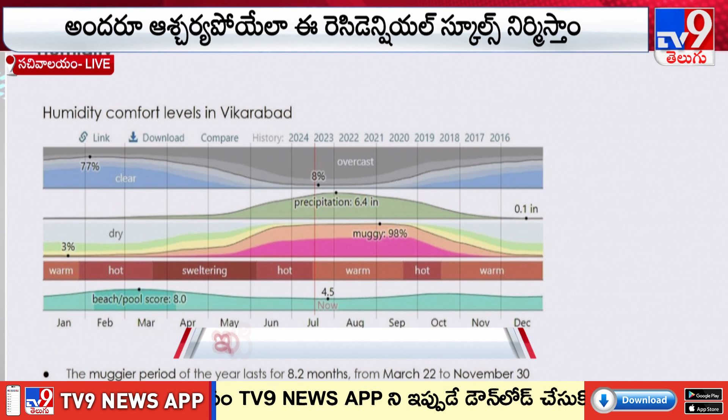So it's a nice part to look at, and the wind becomes an important part of looking at how you orient your buildings and make them naturally ventilated. Because of all these factors, the comfort factor comes in from the humidity that is there, and how humidity gives you discomfort is an important part of our building planning.

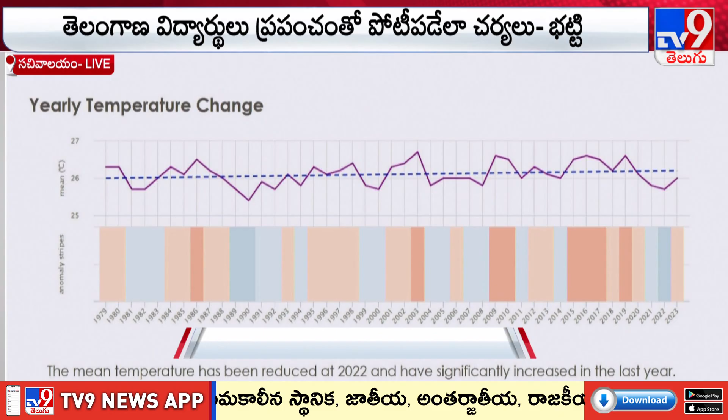And we've mapped for almost 45 years how the change in temperature data happens every year. We can see a significant drop in 2022 in Kodangal, but in some other sites it's going up. This is called a sun path study diagram, where we map the sun for the entire year and how it behaves on the building.

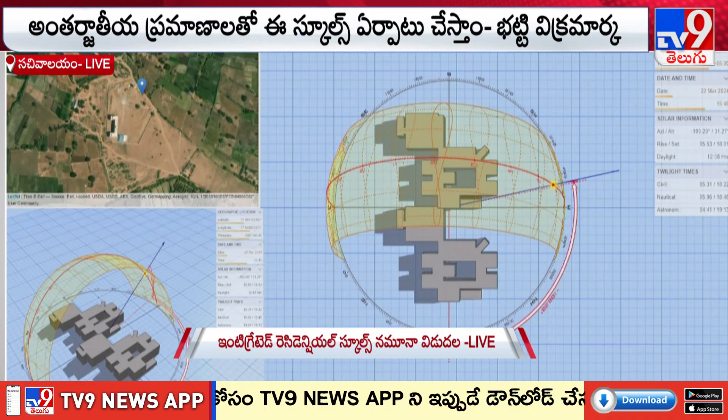So that's the location of the site in terms of the elevation. There are two lakes across the sites.

And we're looking at how the site sections work through this. That's the overall site plan, which talks about the contours of the site, with the lowest being on the northeast and the highest being in the center of the site. There's an existing building that's there.

So this is an existing building and some photographs of the site. The current school is working in this middle photograph that you see. The same classroom is used for sleeping as well as for studying.

So our basic master plan zoning is based on how we look at creating an environment that is interactive for students, and they live as one. It is said that the quality of institutions talks about the future of the country, and how we plan them and create memories for those students becomes important, not only in the learning environment but also in the living environment.

Here we looked at the central axis that is created over there. And that's the open field that we're looking at as a cricket ground. Over there we have the educational academic part. Down we have another sports field. On this side we have the hostel facilities, and the existing building is repurposed.

So this is the master plan, where the master plan for the integrated residential campus addresses varied needs relating to teaching, residing, playing, working, etc., by taking into consideration the climatic condition of the site. The campus tries to bring together different communities under a common umbrella of an integrated school, providing this community access to quality education and state-of-the-art facilities.

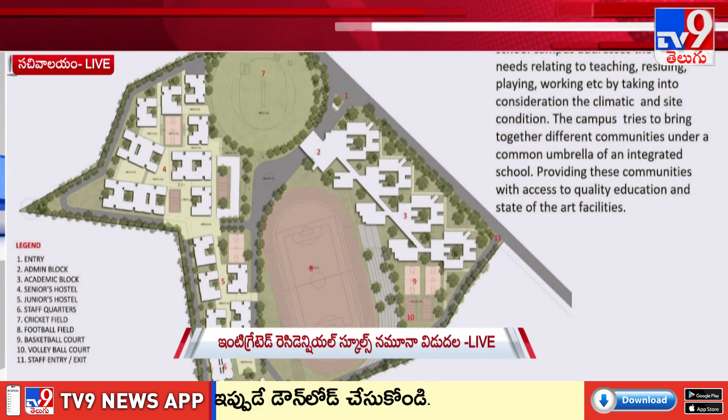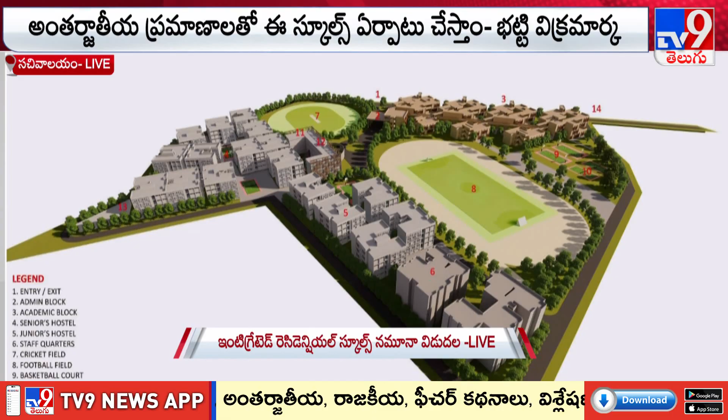So this is the planning which talks about how the behaviors will be of different people and how we can come about. That's the isometric view of the complex, how it would intend to be.

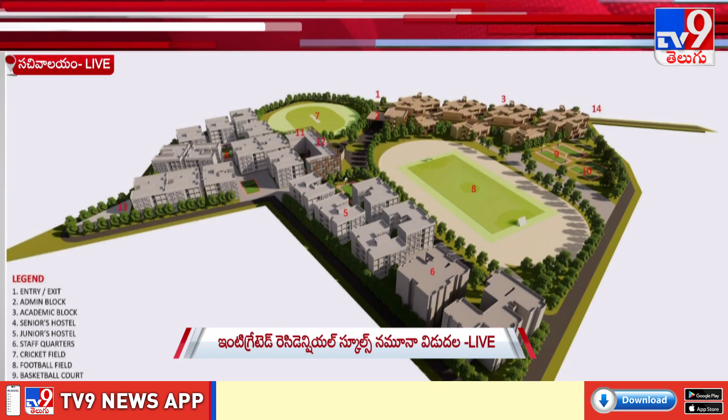So we have northeast a cricket ground, and in the south a football field with athletics track, and then we have multiple courts over there which are to do with volleyball, basketball, and Indian sports as well.

So that's a cluster plan which we're talking about how the four integrated schools will come together. That's the ground floor plan, where we're looking at how each school gets its identity, while at the same time getting integrated with the relationship between different buildings.

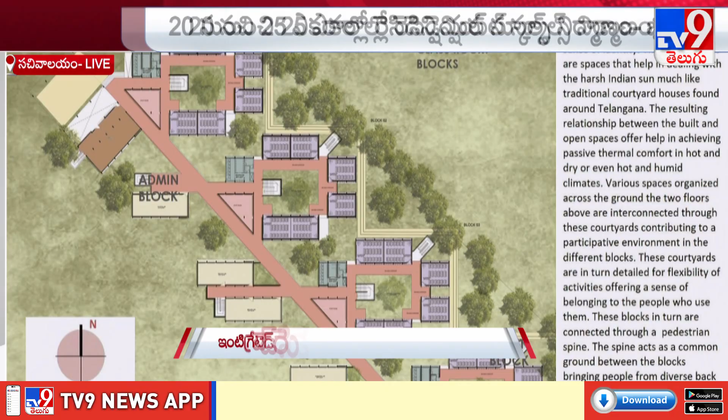The whole orientation of the blocks and cluster is done in a courtyard plan, which allows for traditional methods of building, where the wind flows through and keeps spaces naturally ventilated. The proposal is that we're not even putting windows together in the classroom blocks, and there are shading devices which will naturally ventilate the building and keep it cool all the time.

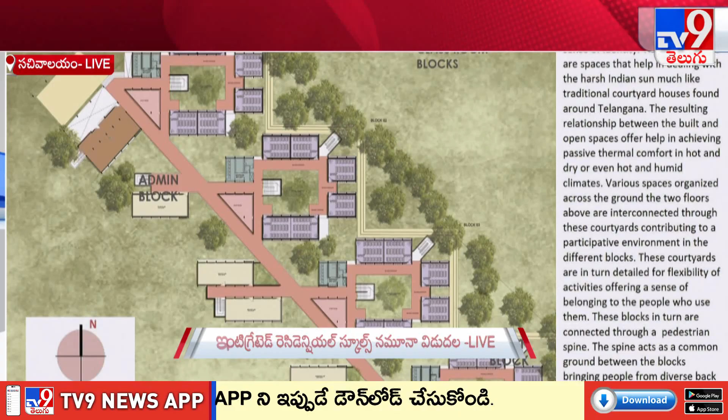That's the first floor plan. That's the cluster block 1, block 2 plans. And this is details of the play fields, where we have the football field and the athletic tracks, the small amphitheater there, and that's the cricket field.

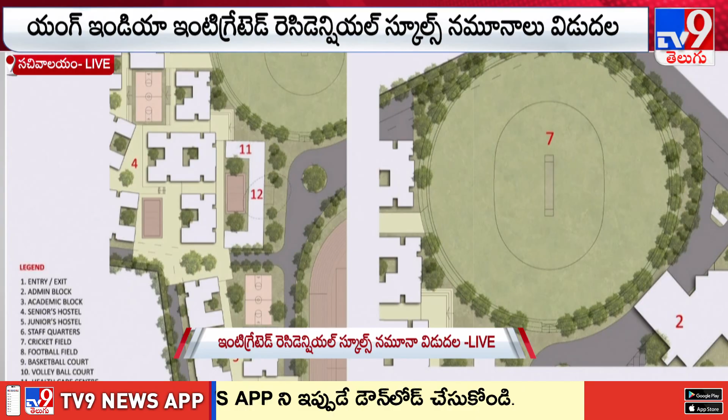The hostels are thoughtfully designed with a low-rise structure. Each of them creates its own identity, similar to the street network we have in our cities. It creates memories of different places and how you find yourself combining with other people. Each dormitory accommodates about 12 people with its toilet facilities attached close by.

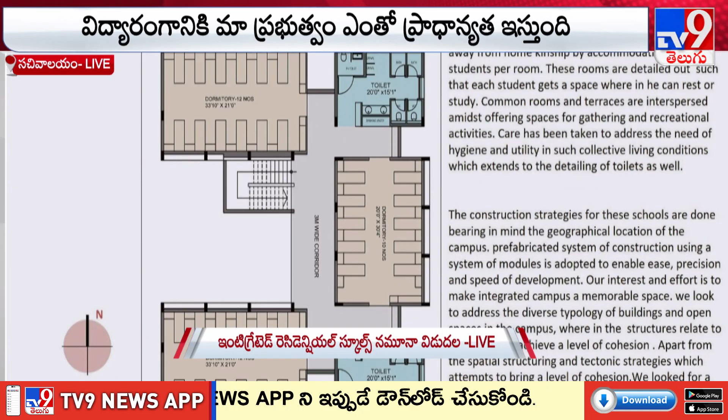That's staff quarters. All the staff will be on the campus, which means there will be a lot more dedicated time given to student and faculty interactions.

So that's the view of the complex, the entry view. This is the main entry to the admin block and the school.

That's the view of the corridor where all the schools get connected. So the whole idea is the built and unbuilt come together, the landscape, the sun path, the environment around, all come together to make a unique experience.

And the courtyards play an important role, where all the students can come together during break times and other times, interacting with each other. So these are the memories that one can carry through their life.

There are also amphitheaters in various areas which we have created using the natural contours, and they again become recreational spaces for students spending their time there.

That's a view of the hostel block. That's a view of the terracing that's done because of the contour.

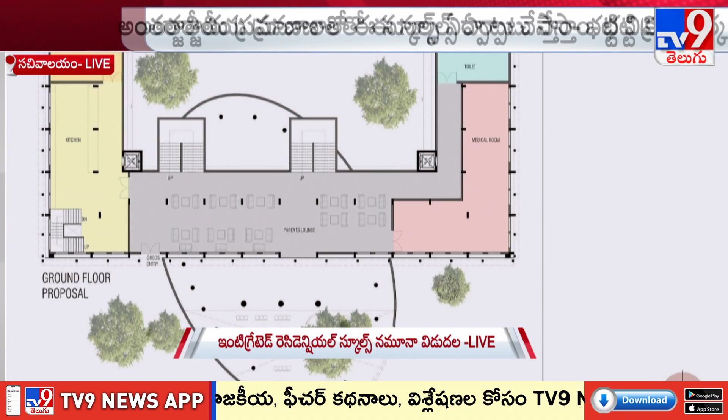This is the existing building which we are repurposing. So we're reusing the building by removing some basic walls and adding a few infrastructure elements like staircase and lifts, and adding a dining, kitchen and clinic facility, and also indoor sports.

So the building has now been redesigned with a facade which is responsive to climate. It was facing east-west, which gains a lot of heat. So we have changed the orientation and made the facade look better.

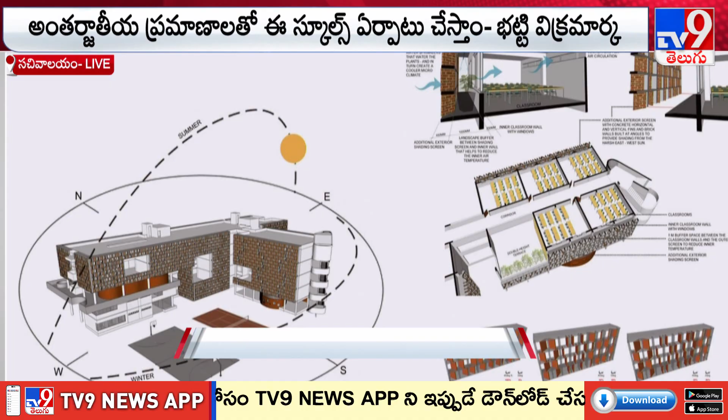Sustainability of any building is important, and our net zero goals are how do you achieve them. This is the basic behavior of the buildings when it comes to sun path and how we shade it.

So this is the idea of how you create natural light and ventilation, where we create a light shelf which bounces off the ceiling and gives you good quality ambient light, and the outside is shaded by the jali. The terrace is used for solar panels and recreation spaces.

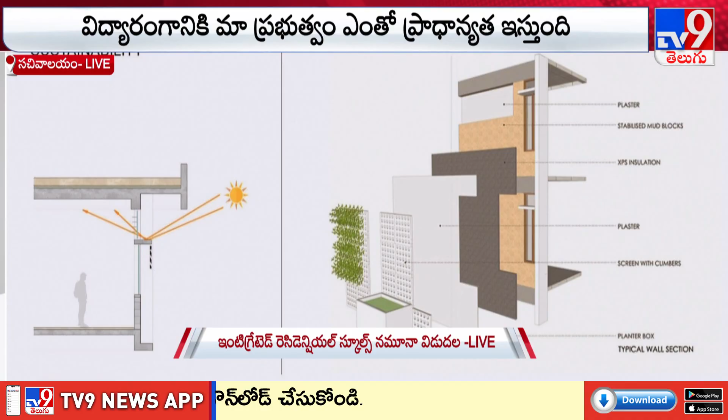So that's the light shelf, how it works. Every facade has 2-3 layers of insulation in terms of screening devices, which controls its own microclimate, keeping it much cooler naturally. GRIHA is the Indian certification for green buildings, and we're looking at achieving a 5-star GRIHA rating for this project. So it's walk the talk.

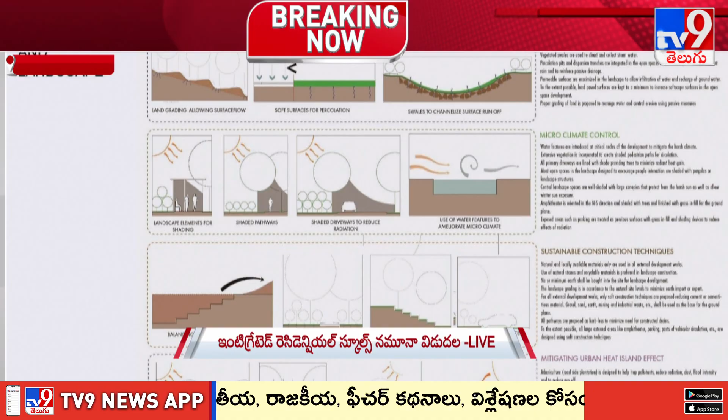Not only just the built, but how landscape, trees and water resources can complement the entire development is what these slides show. The use of local species of trees and plants is an important part of how the landscape can be looked at.